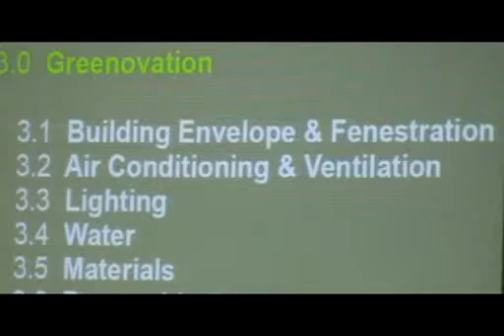Fourth is water. Water resource, you actually spend water in the building. Fifth are the materials. And last, let's touch a little bit about renewable energies. If you're going to already retrofit your building, look at those options.

Okay, building envelope fenestration. I mentioned earlier, no? Nice diagram. Keep the heat out, red arrows. Let the daylight in, the yellow arrows. And moderate the air. If it's good, bring it in. If it's bad, don't bring it in.

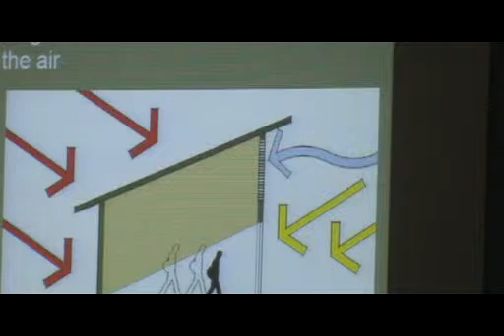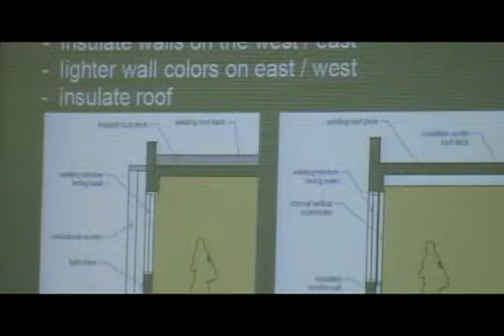Let us say you have a large part of your building on the west. Classic case. Of course, the sun is coming in. Three options. You block the heat before the building envelope. You block the heat on the building envelope. Or you block the heat after the building envelope. Three options.

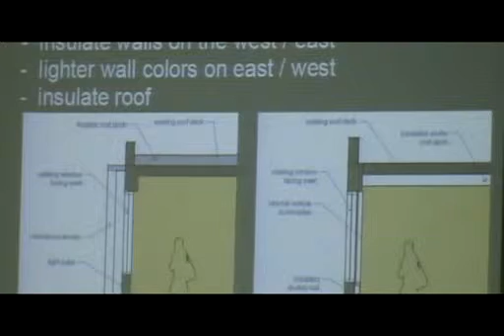So, first option. To reduce solar gain on the west, you can put some sort of sunshade baffles or actually a secondary wall outside your existing building so that the heat is blocked off here and it doesn't reach that inner surface, with an air gap there. With that solution, you're actually making sure that the heat doesn't enter your building from the west.

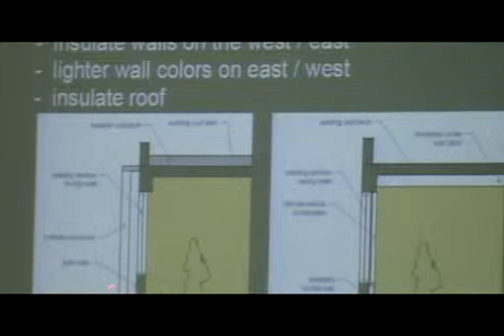Of course, in the window itself, there are many other options, but they're expensive, like double glazing and all sorts of low-E glass. No? If you have to work it inside, it's also possible. For example, you have a facade which you really cannot touch anymore. Then work inside. Maybe put a secondary skin there, maybe with an air gap.

Of course, you might be saying already, somebody mentioned it, you're reducing your interior space. Yes, you are reducing your interior space, maybe about 110 millimeters or 150 millimeters. But that effort is done in order to make sure that the heat doesn't come in.

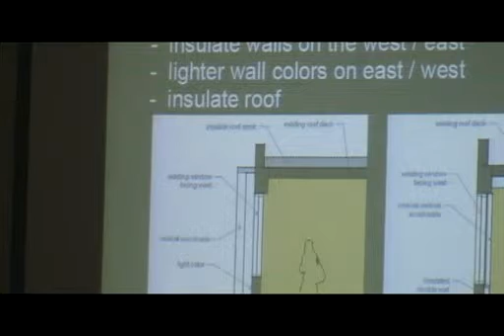No? The roof is a very interesting area also because that's where a lot of heat comes in. So if you can insulate your roof deck or roof from above, better. But if you have no choice, put the insulation below. In other words, be conscious of the fact that the heat is coming on the west side and the heat is coming from above. And therefore, if you want to reduce heat entering the building envelope, try to cut it off before it gets to the inside.

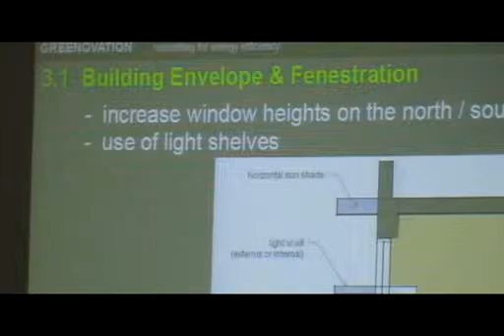What about the north and the south? Remember I said the north is interesting because you can have floor-to-ceiling windows, wall-to-wall, which can bring light in. So for example, if you have the possibility, increase the window size on the north. If you're going to retrofit and knock out all the walls anyway, look at that option.

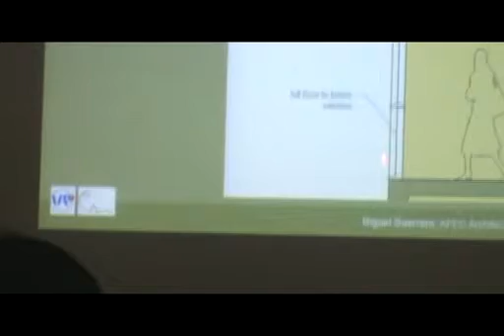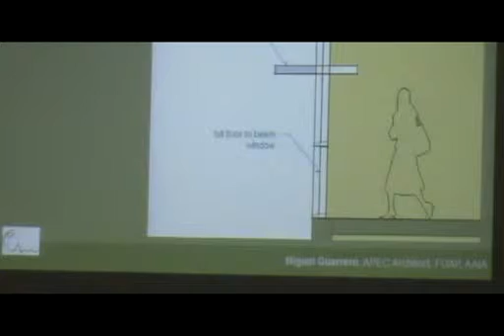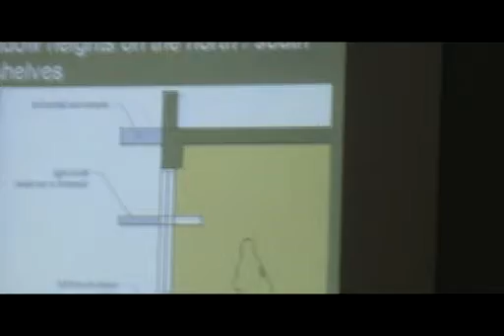There's an interesting thing called a light shelf. If you're going to knock it all the way up, you really need only this window for the people in the room. But then you have this other space of light which is above. You can actually put what is known as a light shelf so that the light coming in here can bounce in deeper into the building. Again, that strategy is in order to bring in natural daylight as deep as possible into the building so that you do not need to turn on the lights all the time during the day.

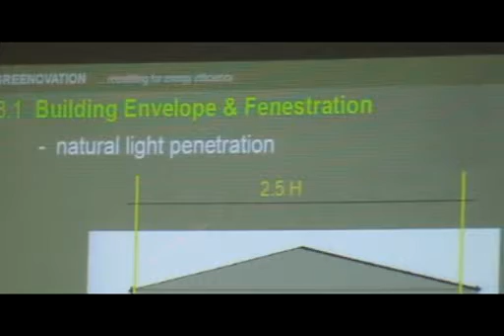Rule of thumb: architects are lazy. We don't like to compute, so I picked up this rule of thumb. Natural light, daylight—not direct sunlight—will enter into a room space 2.5 times the height of your opening. Very simple formula. All you do is measure that height.

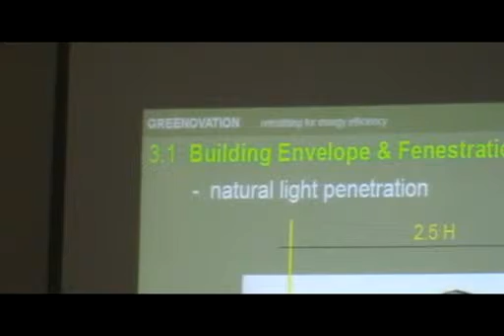For example, normally the height of a floor-to-ceiling window is about 2.4 meters, assuming a floor-to-floor height of 3 meters and a beam depth of 600 millimeters. That's 2.4, which will throw light into about 6 meters, more or less, plus or minus. So that's interesting information, because any space beyond 6 meters in the depth of a room will most likely need artificial light.

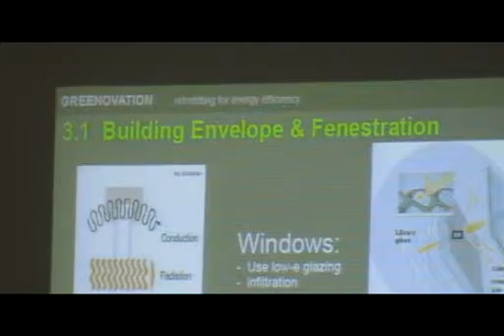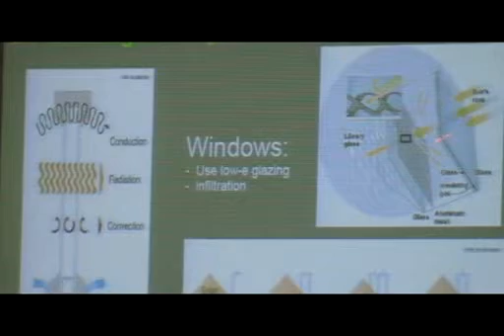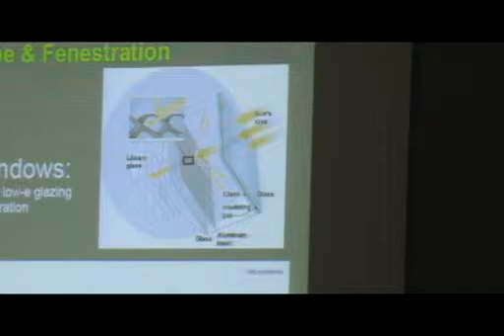As I mentioned earlier, there are several window types: single glazing, which has 88% transmission, double glazing, triple glazing, and low-E glass. There's even an interesting development where they have a small fabric in between two panels which actually blocks the light, but these are extremely expensive and you have to import them. Ayala used low-E glass for one of their buildings in the valley, which they had to bring in from the US—it's not available in the Philippines.

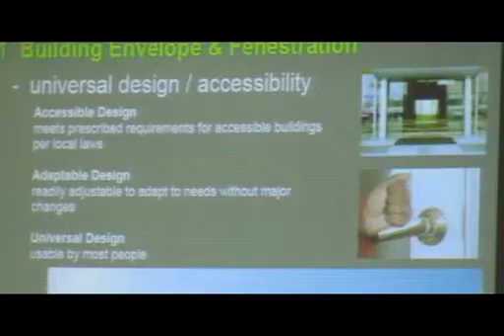If you are going to retrofit your building anyway, introduce this concept of universal design. Universal design is also a very interesting green strategy because it makes a building usable by almost all people.

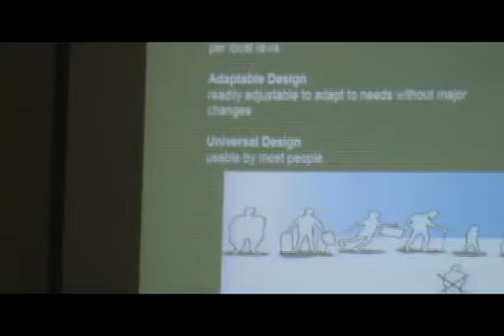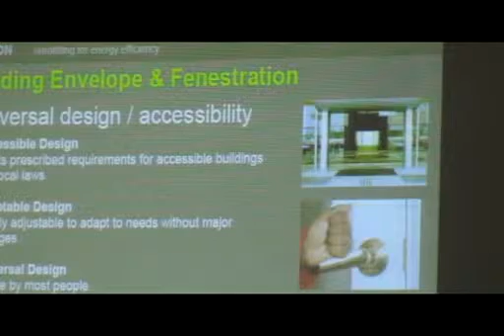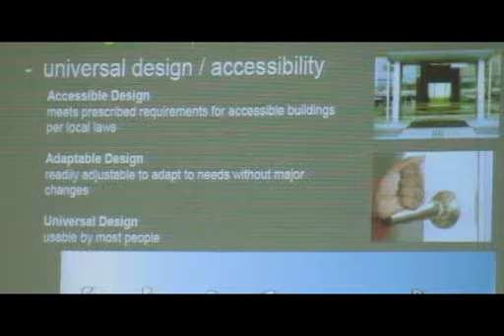Look at this chart here first. See this guy here? He's a normal guy. But normal guys are only 50% of the population in the world. The other 50% are composed of big guys who have to carry lots of bags, people who wobble, people who need canes, people who probably have no hands, wheelchair people, people with very poor eyesight, and mothers carrying children. What is this all about? Design standards are based on this guy.

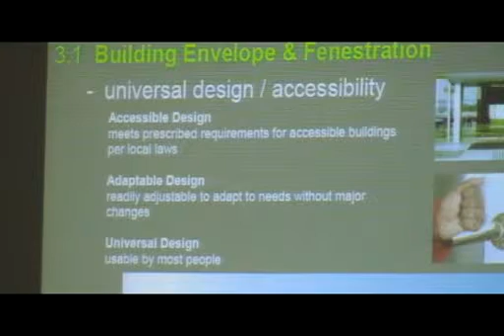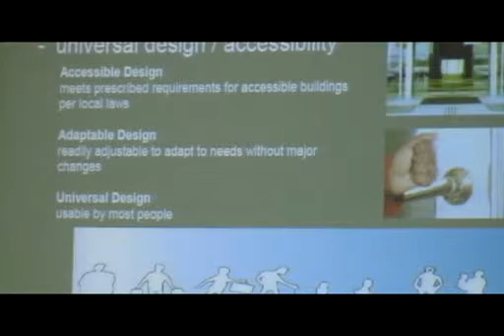Universal design means, why not design for everybody, or at least most people? For example, entrance: why do we have to have steps in the front and have that ramp somewhere in the farthest corner, where the handicapped guy has to go all the way to the other end of the building just to get up? He's the one who suffers most. Why can't you let the other people walk there and have the handicapped person go straight into the building? He's the guy who's suffering. So universal design means let's come up with an entrance which can adjust to almost all sorts of people. Concept one: same level entrance.

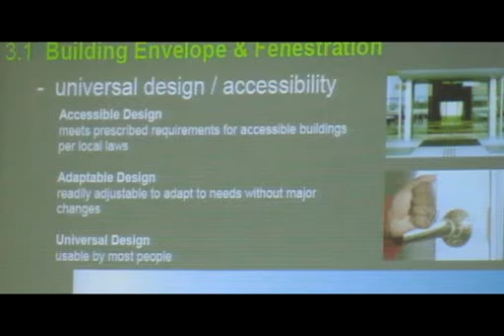Or for example, instead of cylindrical lock sets, why not use lever type lock sets? If you cannot turn, maybe you can even use your elbow. These are concepts which I think, if you're going to retrofit your building, you should look into. I won't talk about it further—this is a whole lecture of mine about universal design. If you want, do a Google search on universal design and you'll find a lot of information there, because it's interesting when you retrofit, how to actually make your building usable by the majority of people. That is a great strategy because it can be used by more people.